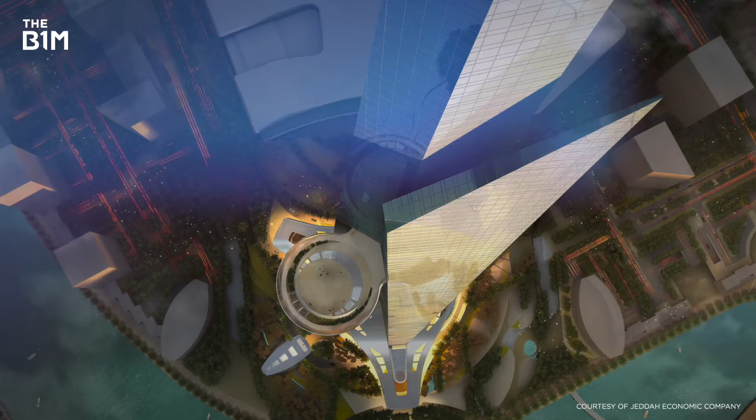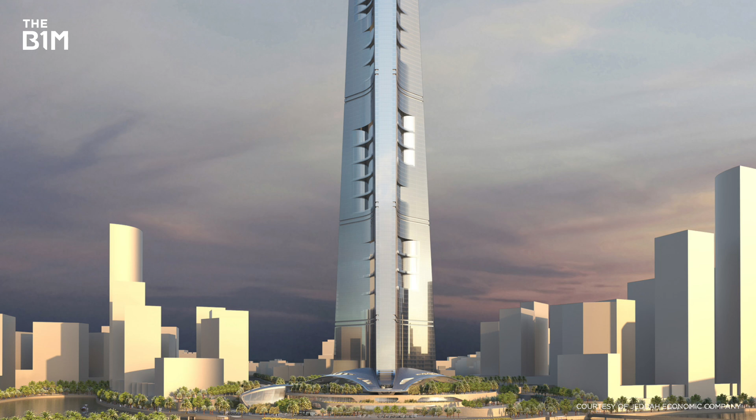Today the building stands unfinished and abandoned 300 metres in the air. After years of political crackdowns and a global pandemic, it remains unclear if Jeddah Tower can ever rise to its full height. Even if construction works do start up again, it'll take a massive feat of engineering to complete. There are no building codes that prepare you for it, over a kilometre tall. This building had never been done. With over $1 billion, and to a large extent the country's reputation riding on this tower, all eyes are on Jeddah to see if it can ever complete the world's tallest building.

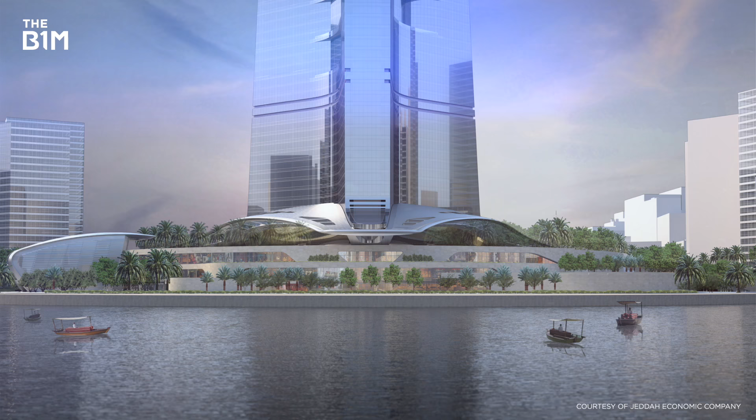Now, like any skyscraper, the taller it is, the more attention it tends to get. Jeddah Tower, soon to be the tallest building in the world. Saudi Arabia is making a major push to diversify their economy. Back in 2011, billionaire investor Al-Walid bin Talal had set his sights on creating a centrepiece for Jeddah Economic City. His bold plan for a skyscraper in, you guessed it, Jeddah, would feature 167 stories of homes, offices and hotels.

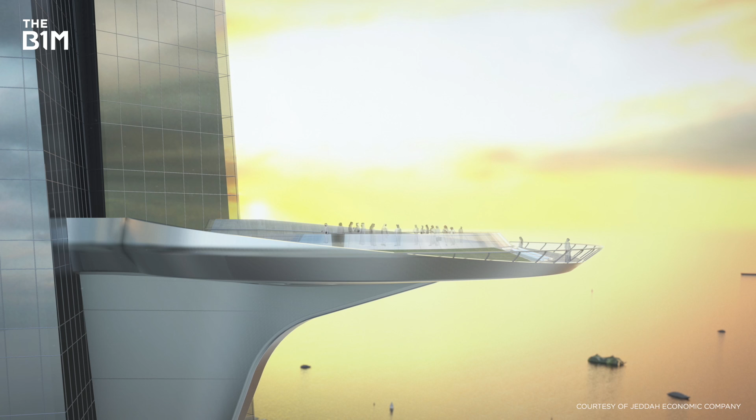At a kilometre tall, it would rise well above the 600-metre threshold for classification in the mega-tall skyscraper category, and would essentially try to make Jeddah the Dubai of Saudi Arabia. It's important to draw a distinction between this and the other huge projects that Saudi Arabia has recently announced, particularly around NEOM. They're led by its public investment fund, which is a state-driven sovereign wealth fund seeking to diversify the Saudi economy away from oil. Jeddah Tower is a private development, albeit one that started out with plenty of backing from many in the state.

Now, to build something a kilometre tall, you need an architect with a strong resume. Enter Adrian Smith. If his name sounds familiar to you, it's because he's the guy who designed the Burj Khalifa.

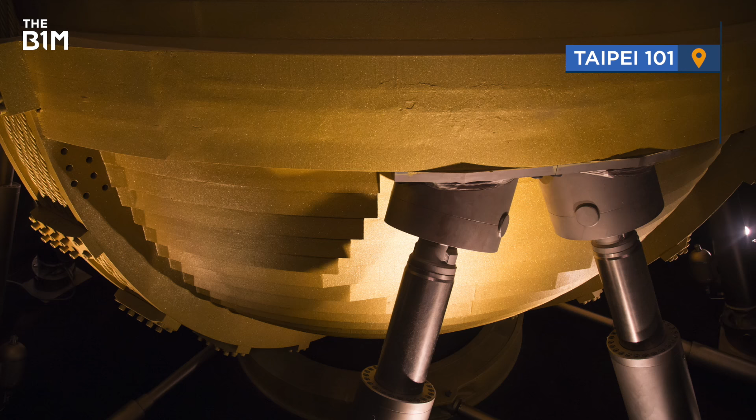One of the biggest challenges with creating skyscrapers this high is the extreme lateral wind loads they face. The taller a building is, the greater its tendency to want to sway towards its top, and that's something engineers must address to ensure safety and comfort. To reduce movement, some supertalls like Taipei 101 or 432 Park Avenue used massive weighted devices called tuned mass dampers near their summits that counteract swaying motion, but these can take up a lot of valuable floor space.

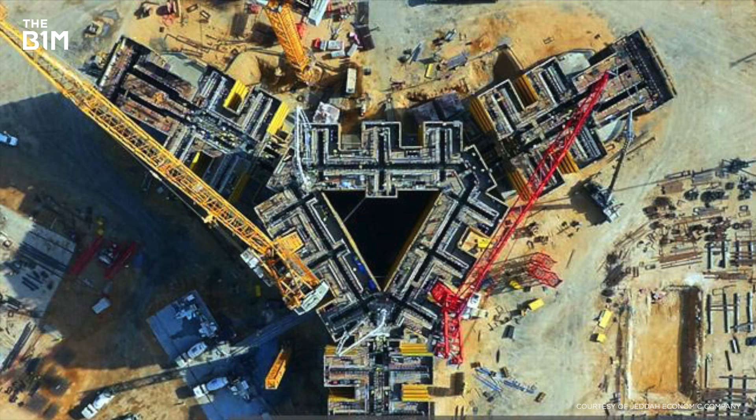For Jeddah Tower, Smith took another route, one that lies in the most fundamental part of the building design itself. Like the Burj Khalifa, the Jeddah Tower plans to use a buttressed core to reach its megatall height. Unlike most skyscrapers that have 4 external walls, this approach sees a hexagonal core reinforced with 3 Y-shaped walls. And that really does work.

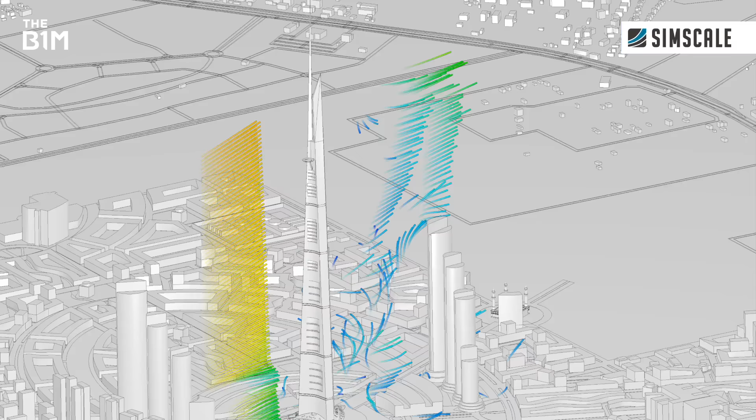It's like the analogous to the 3-legged stool. John Cetra wasn't involved in Jeddah Tower, but he certainly knows a thing or two about the design of extremely tall buildings. It's a very, very efficient system. The triangle works in ways to deflect the forces from 2 sides. It doesn't necessarily have the same effect as, let's say, a square where there's a broad side on the square or a rectangle, and those forces are then deflected to the other three sides. The triangle actually acts as an automatic deflector.

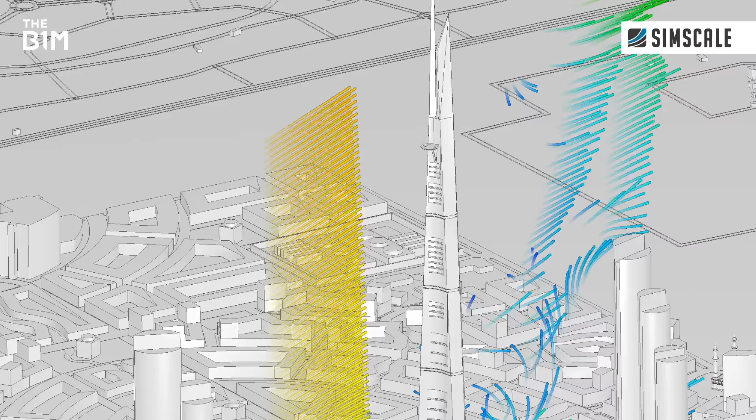The Jeddah Tower would also dramatically taper towards its peak, further reinforcing its resistance to strong winds and making it more aerodynamic than a four-walled straight-up profile. That really matters because winds get stronger the taller you go, and on this site, with a building of this height, there aren't any other buildings or structures around to break up the airflow.

On the 157th floor would be the tower's crowning feature, a jaw-dropping open-air observation deck that would easily become the highest viewing platform in the world.

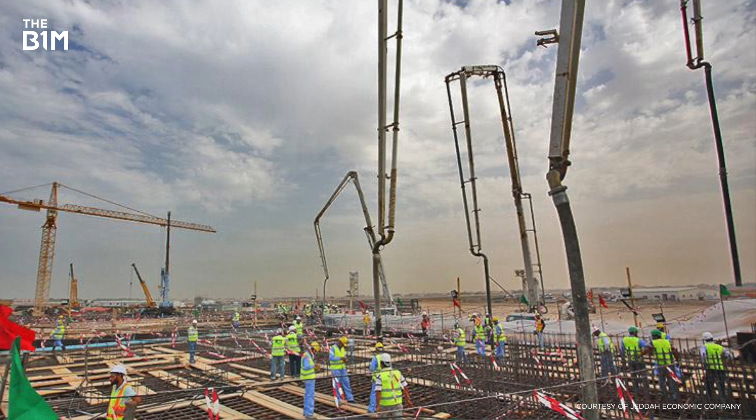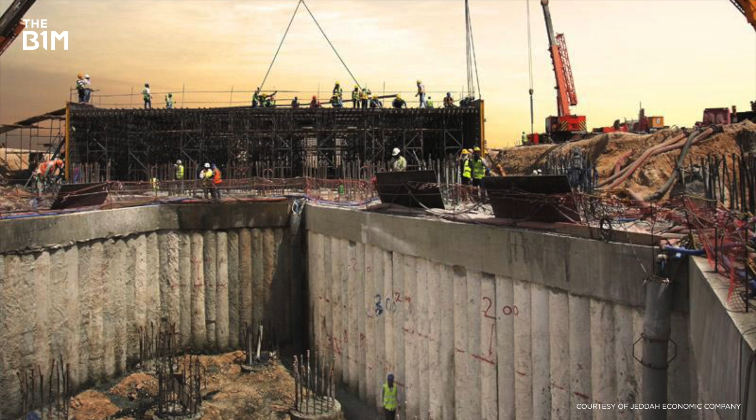With that design finalised, building works first began back in 2013. As we all know, one of the first steps of construction is also the most important: foundations. And to support something this tall, engineers needed to use a lot of concrete.

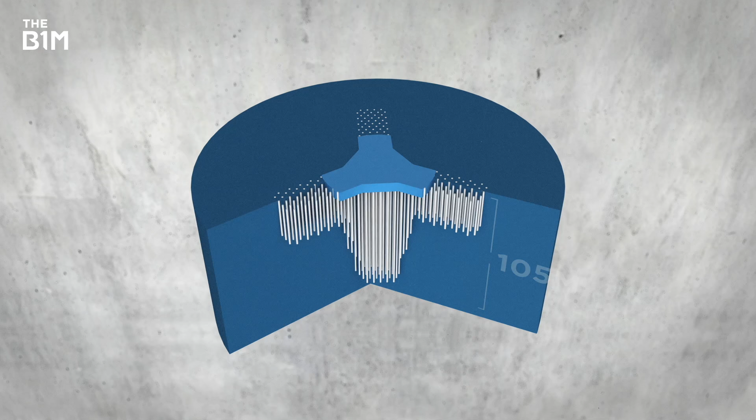First, 270 piles were drilled 105 metres into the ground. Then a giant 5-metre thick concrete slab was placed on top. That would become the base, distributing the weight of all 1,000 metres of skyscraper set to rise above it.

Next, the core was constructed, allowing the tower to steadily rise around it. Concrete was poured using a jump form system. That's a type of climbing formwork that rises with the core structure, allowing builders to work safely and with considerable efficiency inside.

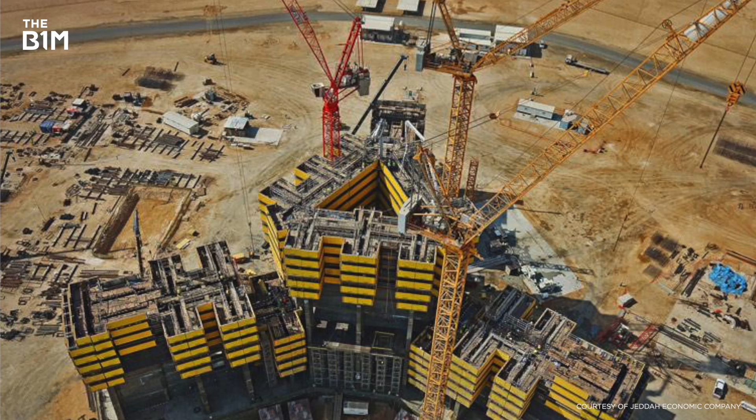Adrian worked on some of the operational and technical systems within the building. As far as the building configuration itself, what we did, the challenge we overcame, we thought about it as being four 40-story buildings stacked on top of one another. So we broke it down into smaller pieces to be able to manage it.

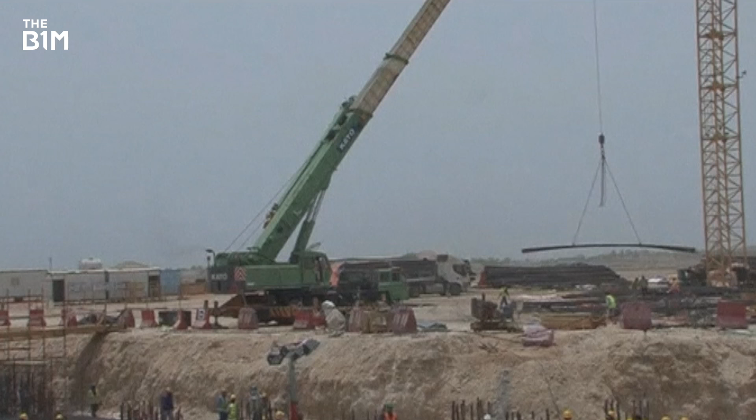In 2015, 2 years after construction began, the project secured $1.2 billion in funding from a Saudi bank and real estate venture. By 2017, Jeddah Tower had risen 63 stories above the desert, around a third of its final height.

Despite some bumps in the road and minor delays, it looked as if the world would soon be getting its next tallest building. Remarkable times in Saudi Arabia.

11 princes, 4 sitting ministers and dozens of former ministers have been arrested. Among those arrested is the billionaire Al-Walid bin Talal, one of Saudi Arabia's most known business tycoons.

Things took a turn when Mohammed bin Salman became Crown Prince of Saudi Arabia and began an anti-corruption purge. Two people caught up in the events included Jeddah Tower's key backers, businessman Prince Al-Walid and Bakr bin Laden, chairman of the tower's construction company, Bin Laden Group.

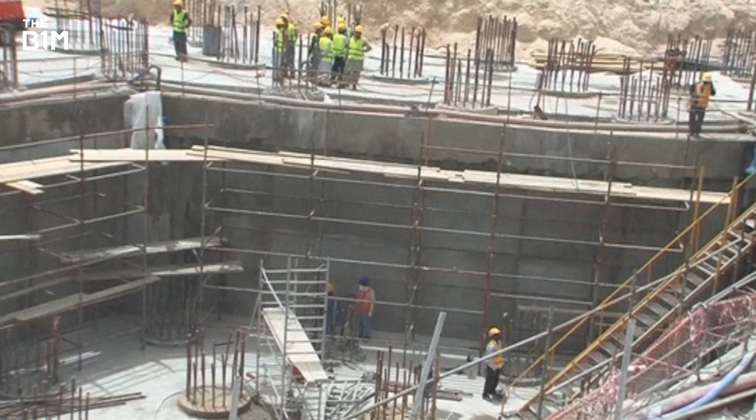That all caused work on Jeddah Tower to briefly stall. The project's backers were eventually released and work briefly restarted, but then there were labour issues with the contractor that further complicated matters, stalling it again.

Just as construction was about to restart in 2020, the pandemic hit and works halted. It appears that ever since then, the tower has sat empty and incomplete. Yet, take a look at the official website, and the homepage still says it's happening.

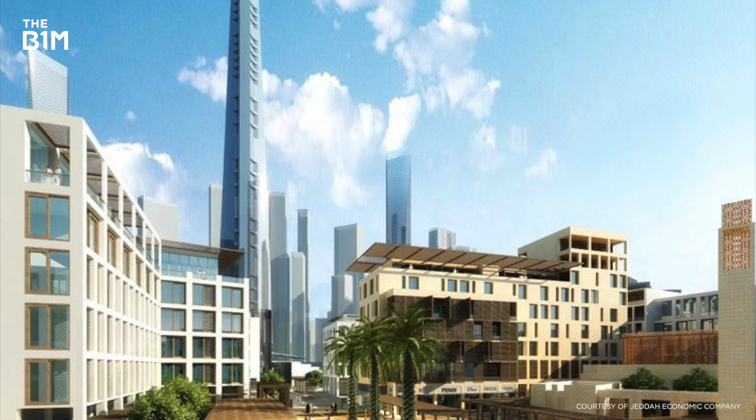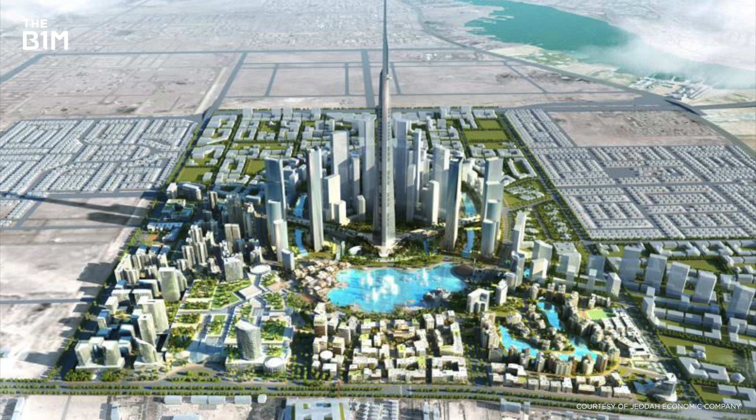Jeddah Tower was going to be a challenge for engineers on a good day. Throw in these considerable political and logistical issues, and it's perhaps little wonder that things have seemingly ground to a halt. So we've seen what it's supposed to look like, but even if everything restarted, is it actually even possible to build this tall? Well, the truth is, we'll never know unless it's actually achieved in physical steel and concrete.

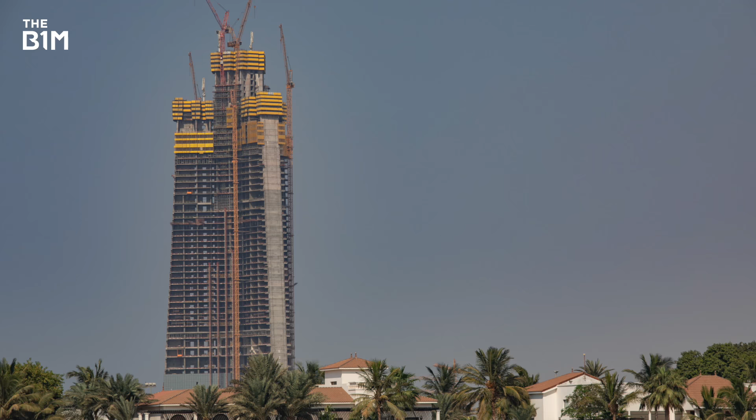What we can say is that engineers were pretty certain they could do it, and built the core to almost the same height as New York's Chrysler Building before things got stopped.

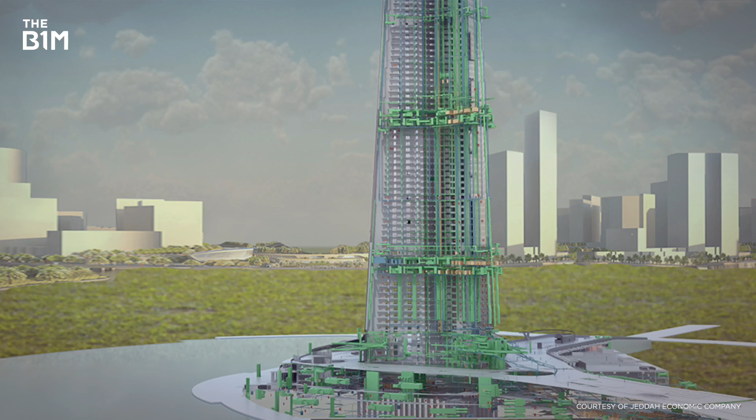They worked from the established principles paved out by other tall buildings, most notably the Burj Khalifa. They modelled, tested and simulated their designs in a wind tunnel and brought them to life in virtual software before even putting a spade in the ground or attempting to pour concrete above the clouds.

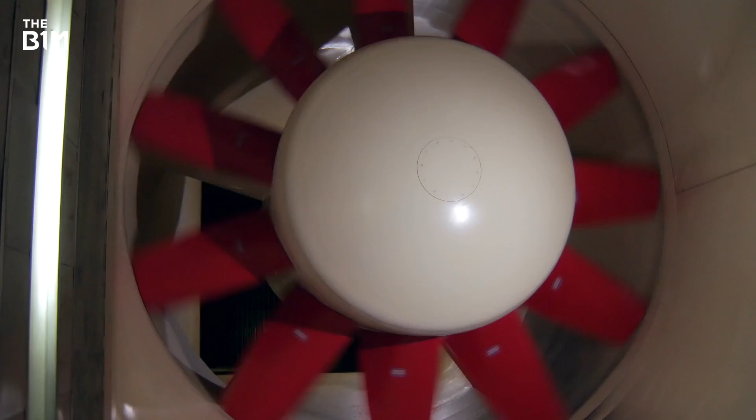The building's aerodynamic performance and ability to manage lateral wind loads was put to the test in a wind tunnel and then modelled in software similar to that produced by today's video sponsor, SimScale.

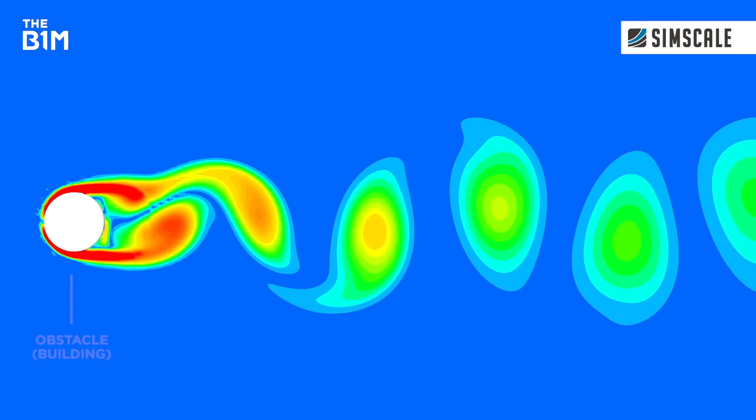All tall buildings have to manage wind loads, and as we said, it gets harder the higher you go. When strong winds move around structures, areas of lower speed air, also known as separation vortices, emerge on their opposite side, creating suction forces that pull at the buildings, putting them at risk of swaying back and forth. Tapering a building as it rises helps to break up the uniformity that causes this.

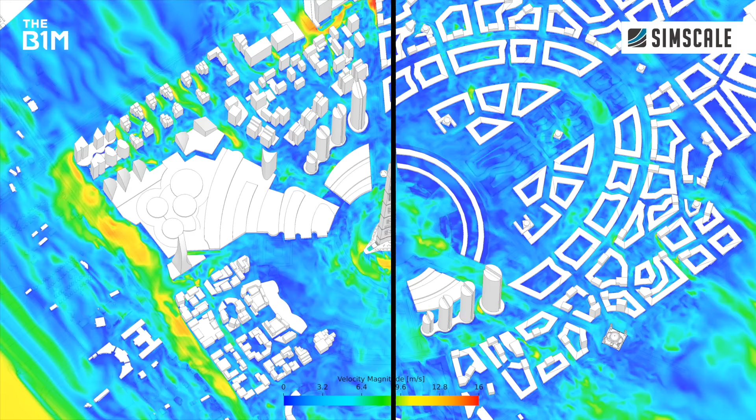We ran a model of Jeddah Tower through SimScale software to show you just how effectively this works. We also created a simulation showing how wind forces could influence the surrounding area at street level, both with and without the skyscraper.

You can see the completed tower would be likely to produce stronger gusts on the ground near the base, so designers will need to work to minimise that and protect pedestrians.

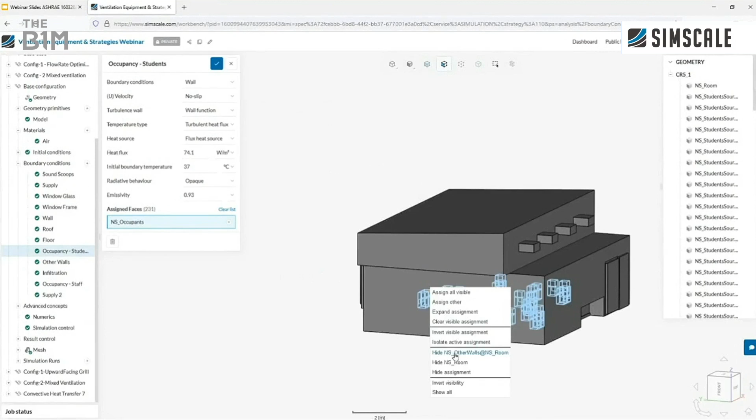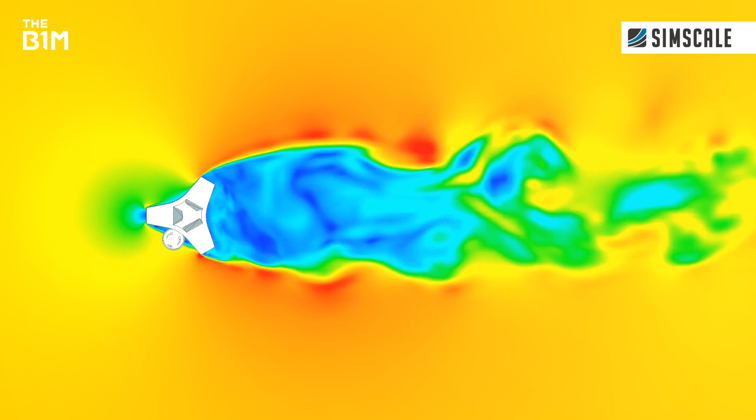SimScale is a powerful cloud-based engineering and simulation platform that enables everyone to create high-fidelity simulation models for building physics, urban design and sustainability. You can model everything from wind conditions to thermal performance, indoor air quality and thermal comfort. By running these virtual tests early in the design process, teams can solve problems before construction starts, saving time and money. And for Jeddah Tower, time is money, the longer construction is stalled.

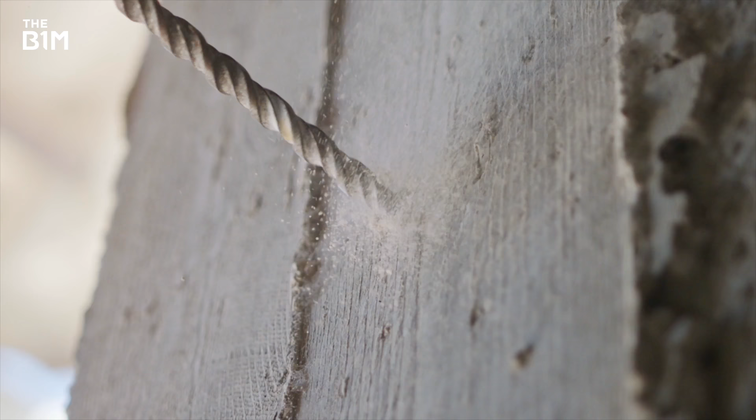To take this concrete core in the desert and turn it into the full-height occupied building will mean running tests to understand the strength and rigidity of the existing structure before recommencing construction on top of it. The building's structural lifespan calculations are thrown off by part of it being 6 years older than the rest.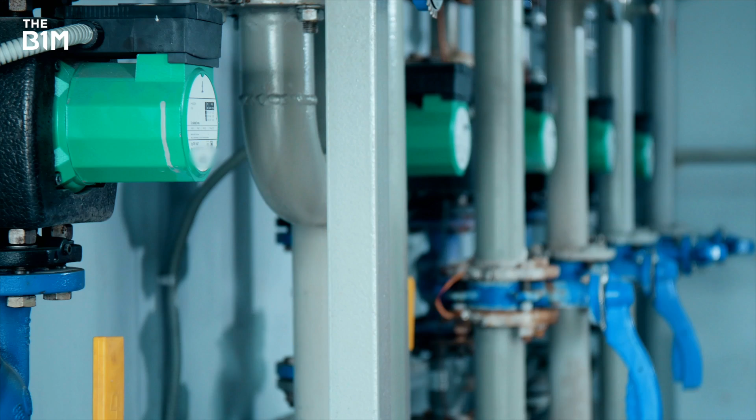Once the remainder of the structure goes up, an advanced cladding system needs to follow close behind. Mechanical systems that can withstand extreme conditions 1,000 metres in the sky then need to be designed and installed. And it'll need one of the tallest elevators ever built.

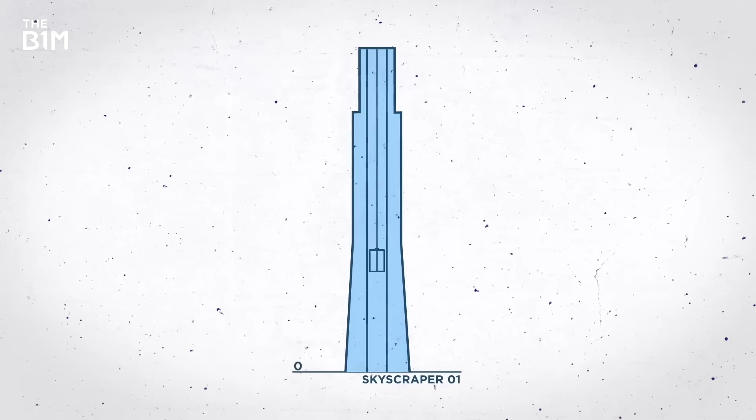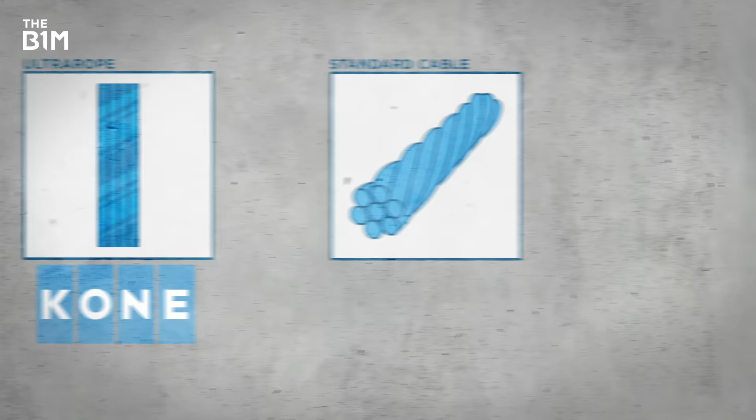Historically, skyscrapers this tall have required people to change elevators on the way up. That's because after a certain point, around 500 metres, the weight of the steel ropes used to lift them becomes too much. But innovations like UltraRope by KONE, which we mentioned in a recent video, replace those steel ropes with a carbon fibre material that's 7 times lighter and more durable. It means an elevator can travel up to 1 kilometre into the sky, and the B1M understands that KONE's system is specified to be installed at the Jeddah Tower should the building proceed.

As you might be gathering, the whole extreme height thing really does make this project tricky. Despite that, some designers are turning it to their benefit.

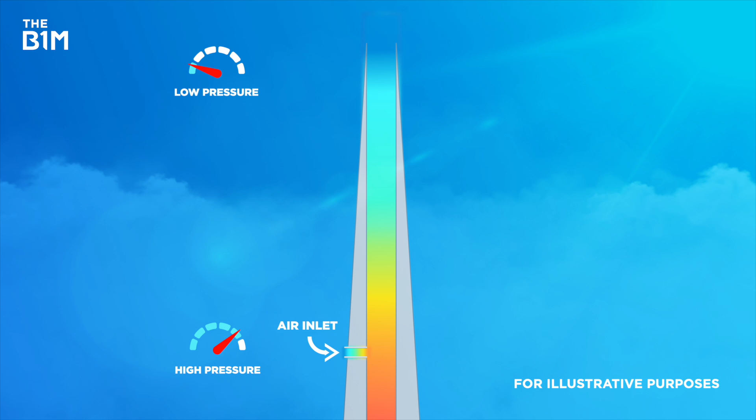At those upper elevations, you have actually higher intensity of solar. For example, the top of the building has a spire, which is the architectural silo. We had to build an environment where we could control the temperature, so the concrete is not expanding and contracting and in turn would crack. We utilize the temperature variation to create a stack effect inside the silo to be able to ventilate it properly. So it doesn't really use any energy. It's self-ventilated, but it's very controlled.

But the Jeddah Tower's location in the desert brings more than just intense heat to the table and creates a huge maintenance requirement. The sandstorms are abrasive, so you can imagine that very fine sand swirling around the building, and you want to have very durable coatings on the building that will not literally be sanded away. That also then affects the cleanliness of the building. In the Middle East, they use many systems that don't require a human being to be on the scaffolding, and it's automatic.

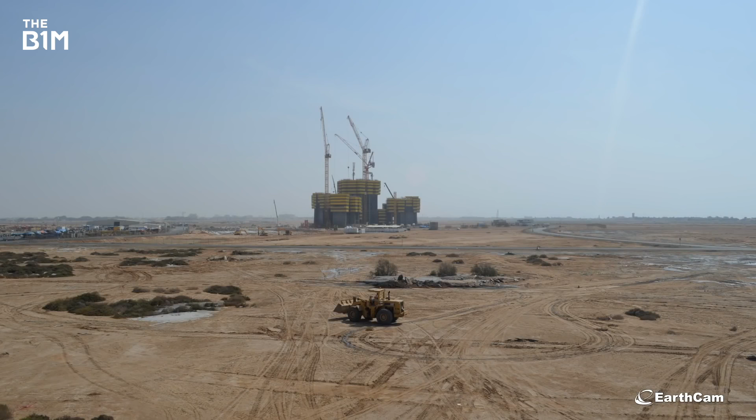Now, building something as bold as the world's tallest building will bring you headlines and some jealousy. You might recall plans for Dubai Creek Tower, a scheme announced by Emaar to bring the title of world's tallest structure back to the country, that started work and then paused again after Jeddah Tower hit the buffers. Its foundations remain sitting there, kind of like a quiet warning to Jeddah should it ever start up again.

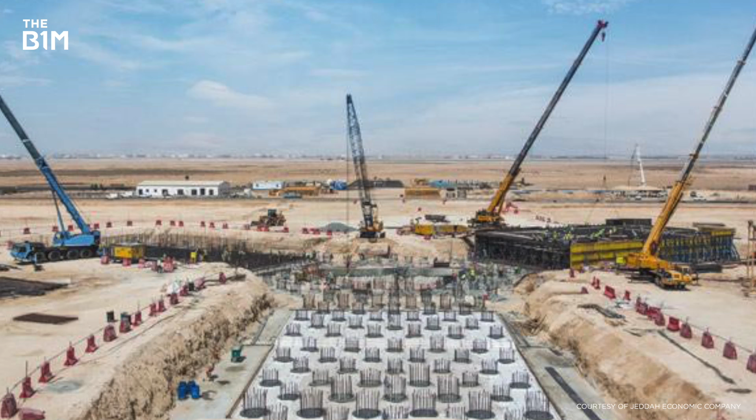Despite the long pause, Mehdi thinks things could start to move soon. There is a lot of talk right now and planning to restart. They have built the utilities and roadways at the site. Obviously, it's been stopped for a while, and there are things that need to be rethought for the process. So now I think we're in a much better position.

While it may still be possible to turn this super tall stump into the world's tallest building, right now the challenges of funding, politics and extreme engineering all appear equally daunting, collectively putting a heavy block on progress. If the world's first kilometre-high skyscraper ever rises from these sands, it'll be both record-breaking and remarkable in many ways.